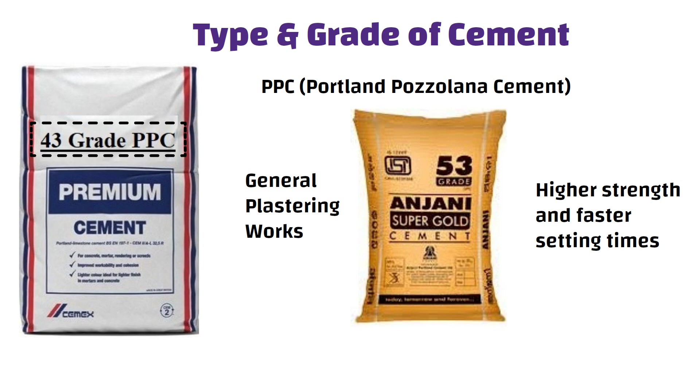Let us start with type and grade of cement. PPC, Portland Pozzolana Cement of grade 43, is commonly used for plastering in construction. PPC 43 is suitable for general plastering works, while PPC 53 is used when higher strength and faster setting times are required. Ensure the cement used for plastering is not older than 3 months.

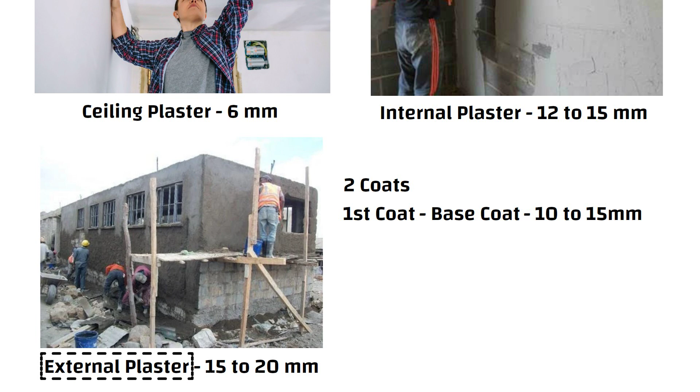Thickness of plaster: the thickness of ceiling plaster shall be 6 mm, internal plaster 12 to 15 mm, and external plaster 15 to 20 mm. External plaster is generally applied in 2 coats. The first coat is a base coat of 10 to 15 mm, and the second coat is thinner, typically around 3 to 5 mm.

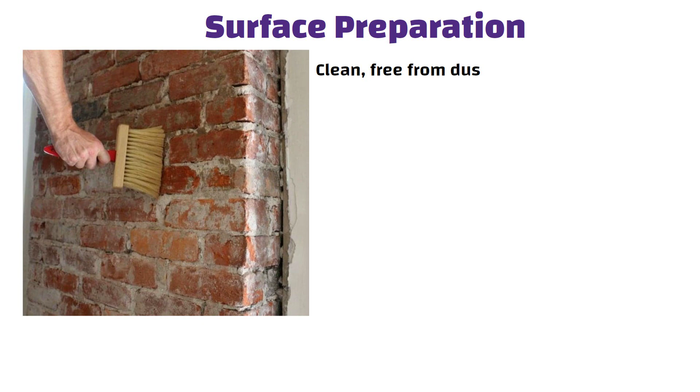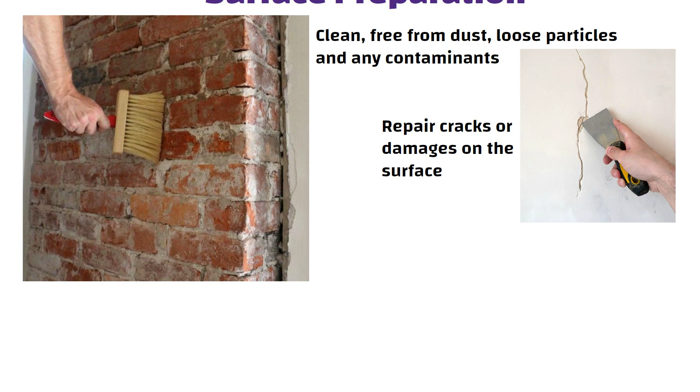Surface preparation: ensure the surface to be plastered is clean, free from dust, loose particles, and any contaminants. Repair any cracks or damages before starting the plastering process. If the surface has old plaster or paint that is flaking or peeling, it needs to be removed before applying new plaster. Before applying the plaster, it is recommended to wet the surface with water. If not done, the wall will absorb water from the mortar, which may lead to cracks in the plaster.

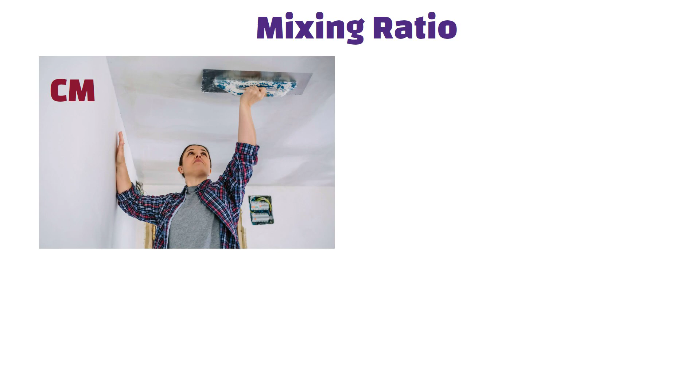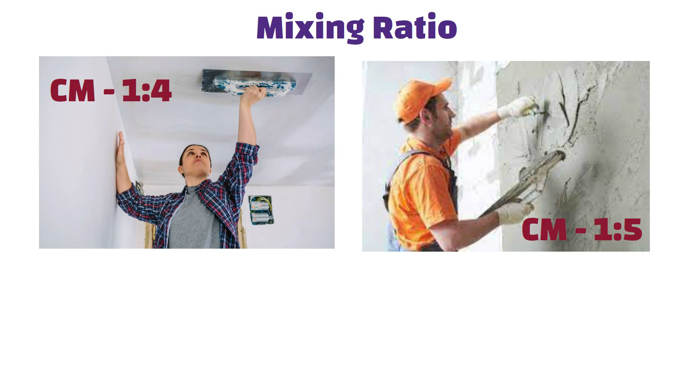Mixing ratio: the correct mixing ratio for ceiling plaster is 1:4, that is, 1 part cement to 4 parts sand, while for wall plaster it should be 1:5. If not followed, it can lead to reduced strength and potential cracking.

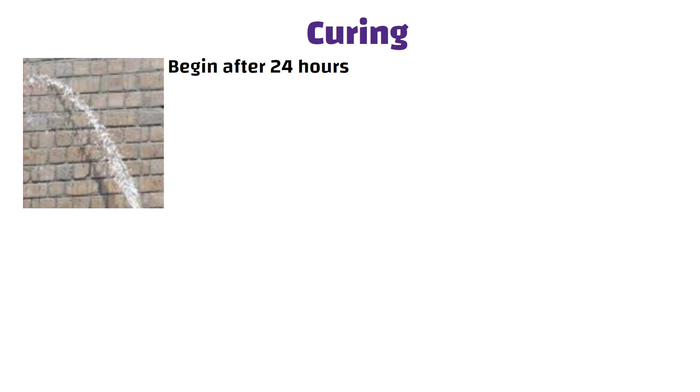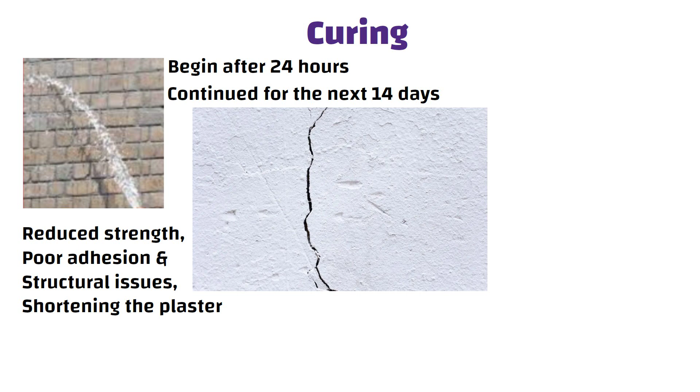Curing: the curing of a plastered surface should begin after 24 hours and continue for the next 14 days. If not followed, it may cause cracks, reduced strength, poor adhesion, and structural issues, shortening the plaster's lifespan. The date should be mentioned on the plastered wall to facilitate tracking of the curing process.

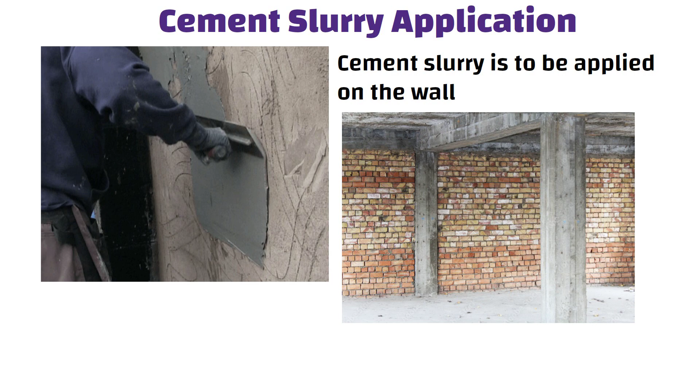Cement slurry application: before applying plaster, cement slurry is to be applied on the wall. This helps the plaster stick strongly to the wall. For concrete surfaces like columns and beams, dry cement needs to be applied because concrete doesn't absorb water, and it creates a strong bond between the concrete wall and plaster.

Chicken mesh: for joints between concrete column and wall and concrete beam and wall, chicken mesh is to be used. It increases strength and prevents crack formation.

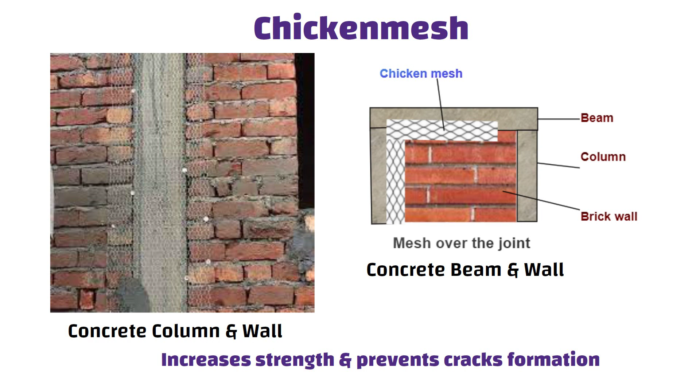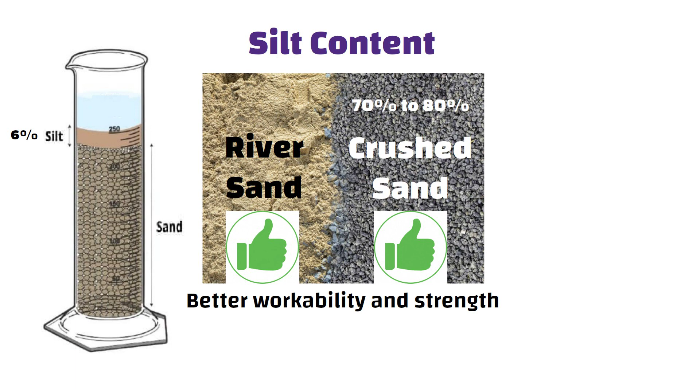Silt content: the silt content percentage in sand should not exceed 6% by weight. A mixture of crushed sand and river sand is often preferred for plastering as it combines the advantages of both types, providing better workability and strength. The commonly used ratio is approximately 70 to 80% crushed sand and 20 to 30% river sand. Sand should be sieved before use to ensure uniform particle size and remove any impurities that could affect the quality of the plaster.

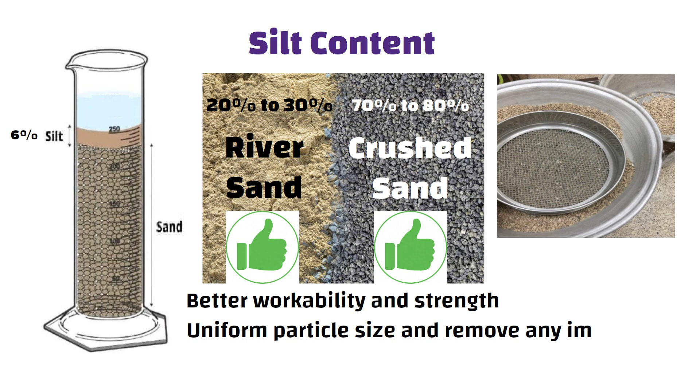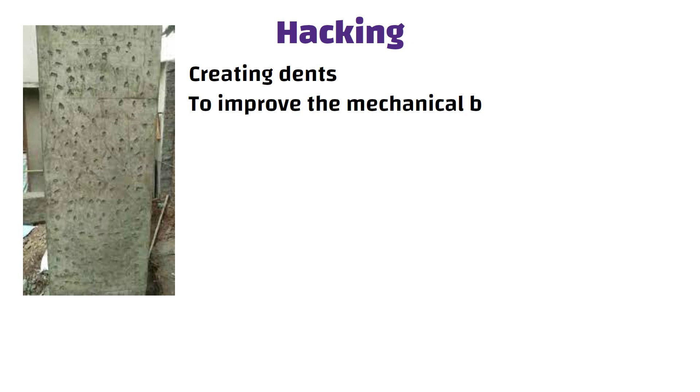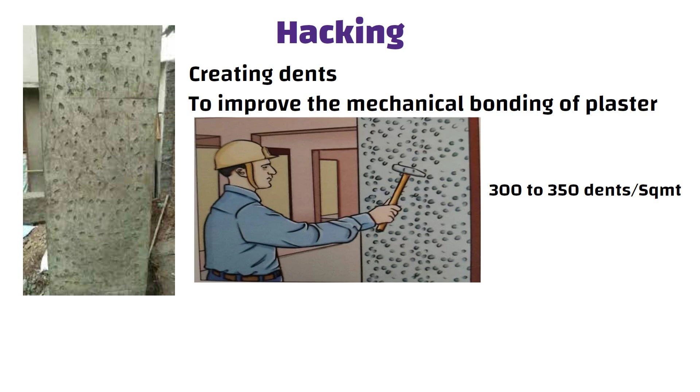Hacking: hacking is a process of creating dents on concrete surfaces to improve mechanical bonding of plaster. By striking the concrete with a chisel, around 300 to 350 dents per square meter are advised. It should be done at least 3 days after casting the concrete for better results. This allows plastering materials to adhere effectively, overcoming the challenge of bonding with smooth concrete finishes.

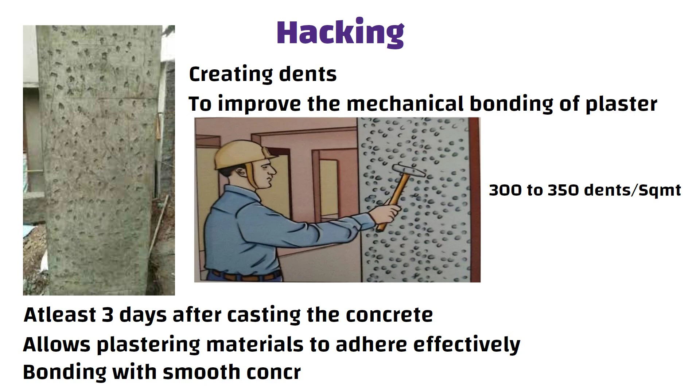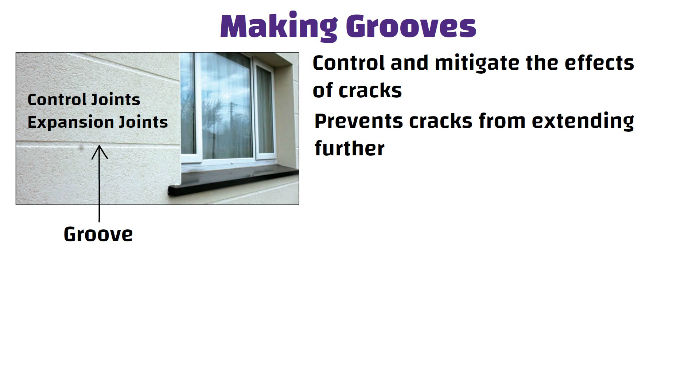Making grooves: making grooves on external plaster can be a technique used to control and mitigate the effects of cracks that may form over time. These grooves are often called control joints or expansion joints, and they prevent cracks from extending further and spreading across the entire surface.

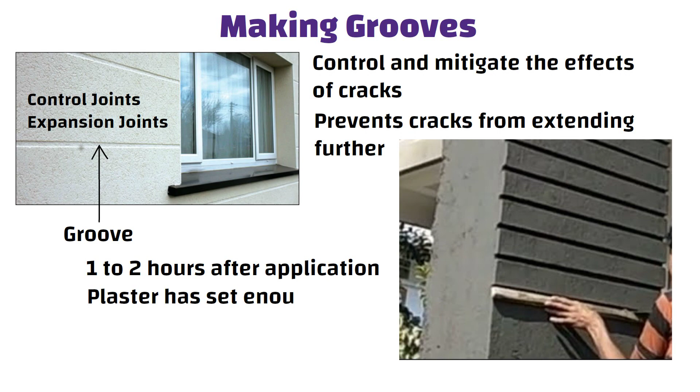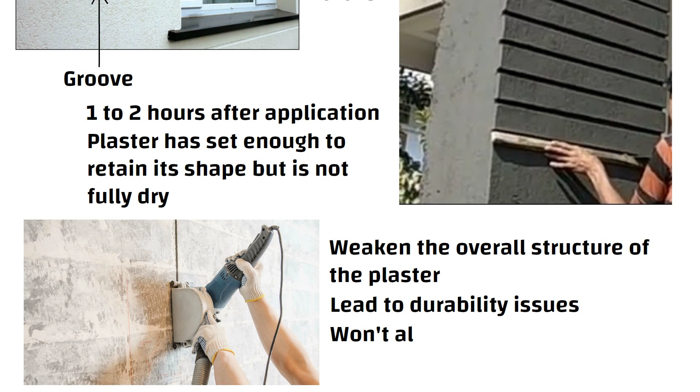When making grooves in external plaster, it should be done 1 to 2 hours after application, when the plaster has set enough to retain its shape but is not fully dry. If grooves are attempted in dry plaster, this can weaken the overall structure and may lead to durability issues over time. Making grooves in dry plaster won't allow for controlled cracking, hence it is crucial to create the grooves while the plaster is still wet.

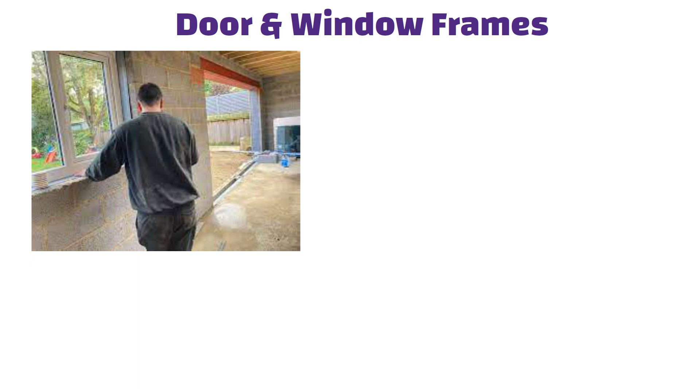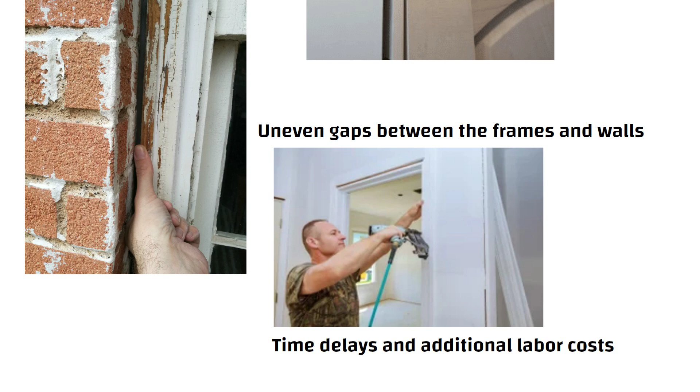Door and window frames: for better alignment, door and window frames need to be fixed before plastering. If not followed, the openings may end up misaligned or not properly centered, resulting in uneven gaps between the frames and walls. Fixing frames after plastering can lead to time delays and additional labor cost, as extra work is needed to adjust and fit the frames correctly.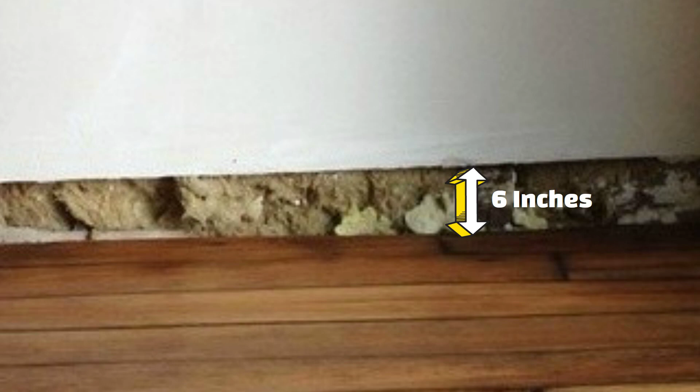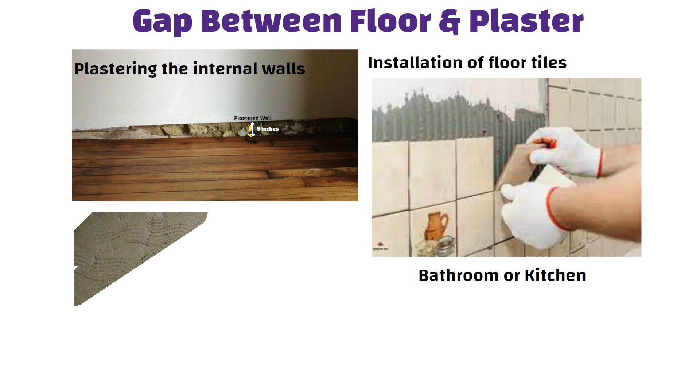Gap between floor and plaster: at the time of plastering the internal walls, a gap of 6 inches needs to be left between the floor and plastered wall. This gap allows for installation of floor tiles. When tiling a bathroom or kitchen, it is essential to keep the plastered surface rough to ensure better adhesion for the tiles.

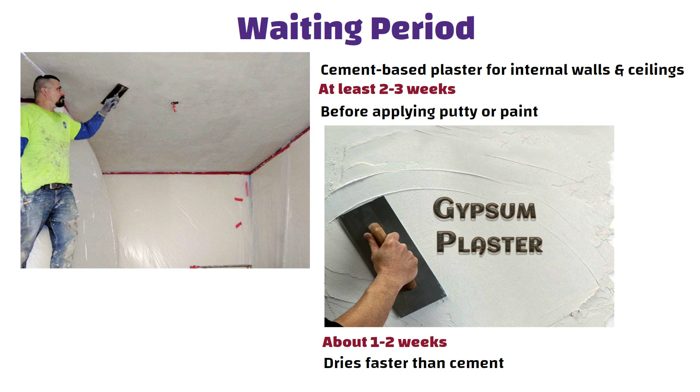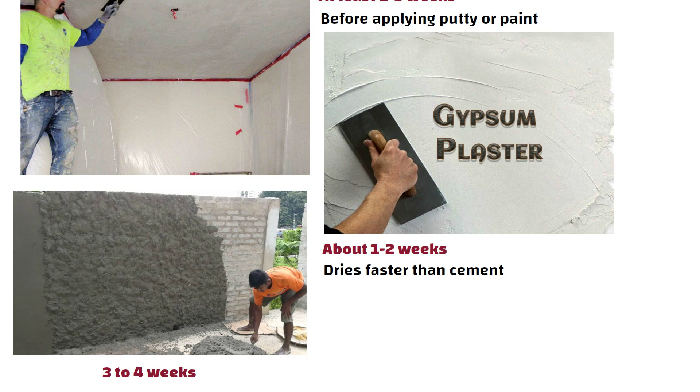Waiting period: in case of cement-based plaster for internal walls and ceilings, it is recommended to wait at least 2 to 3 weeks after plastering before applying putty or paint. For gypsum-based plaster, you can typically apply putty or paint after about 1 to 2 weeks, as gypsum dries faster than cement. For cement-based plaster on external walls, waiting at least 3 to 4 weeks is recommended. If not followed, and putty or paint is applied too early, it can result in poor adhesion and premature failure, leading to peeling, cracking, or bubbling of the finish.

Making of mortar: when preparing mortar, a mixture of cement, sand and water, you should avoid mixing it directly on the ground or any soil surface. Instead, use a clean and appropriate container or mixing area to combine the ingredients.